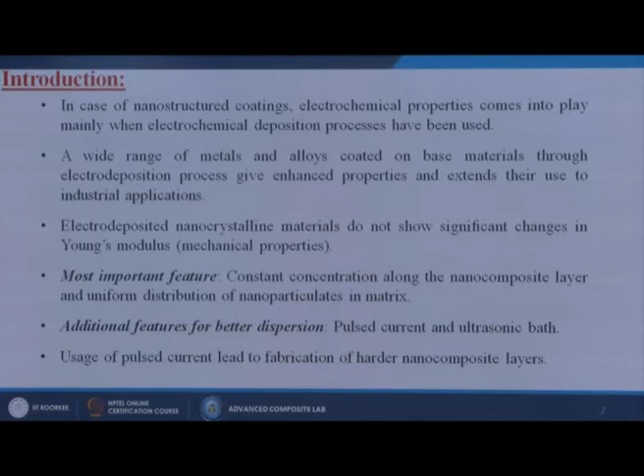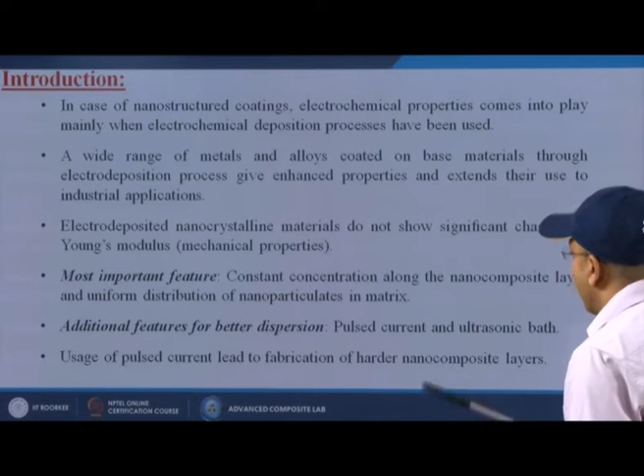The most important feature is constant concentration along the nanocomposite layer and uniform distribution of nanoparticulates in the matrix. Additional features for better dispersion are pulsed current and the ultrasonic bath. Usage of pulsed current leads to fabrication of harder nanocomposite layers. So, depending upon the synthesis technique we adopt, the nanostructured composites or coatings can give different properties.

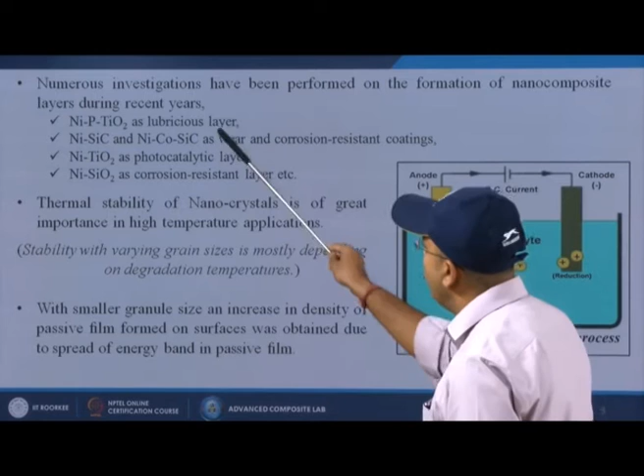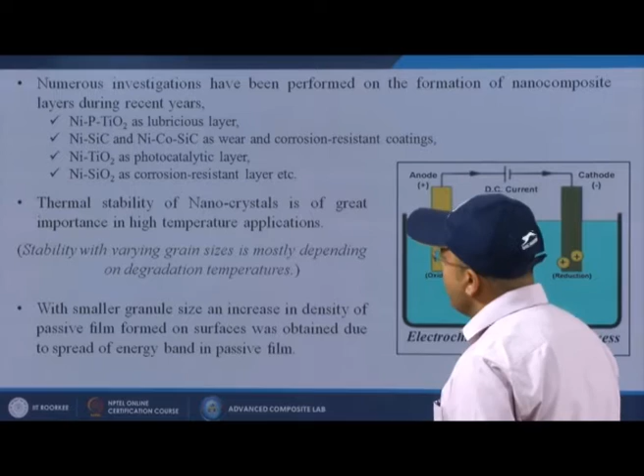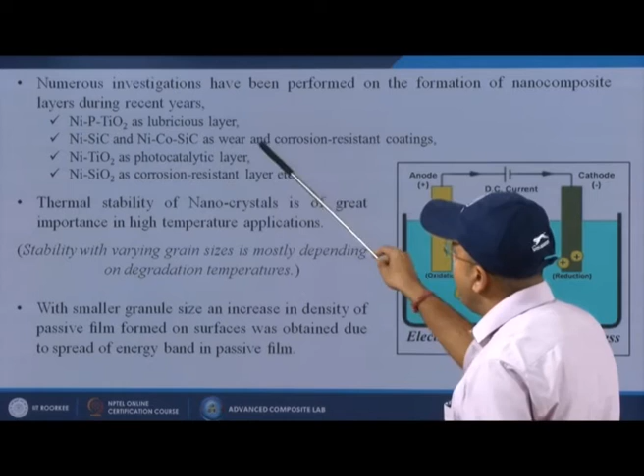Numerous investigations have been performed on the formation of nanocomposite layers in recent years, like nickel-phosphorus-titanium dioxide as a lubricious layer, nickel-silicon carbide and nickel-cobalt-silicon carbide as wear and corrosion resistant coatings, nickel-titanium dioxide as a photocatalytic layer, nickel-silicon dioxide as a corrosion resistant layer, etc. From these we are trying to show that when we change the material shapes or compositions, the total properties of the substrate change.

Thermal stability of nanocrystals is of great importance in high temperature applications. Stability with varying grain size mostly depends on degradation temperature, which will come in subsequent slides. With smaller grain size, an increase in density of the passive film formed on the surface was obtained due to the spread of the energy band in the passive film. That is one of the vital parameters of these techniques.

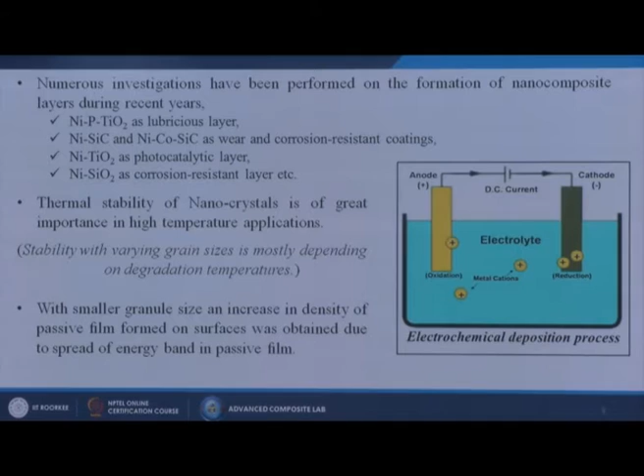Here is a schematic illustration. We have gone through it earlier, but for your remembrance I am telling you once again. We take an electrolyte based on what material we are going to coat; you have to choose an electrolyte of that particular metal's ions. Suppose I am going to coat our material with copper, then some copper sulphate solution or copper related material is used as the electrolyte, and we put our material on the cathode side.

When we generate a potential difference between these two electrodes, the copper sulphate divides into two parts, copper and sulphate, and then the copper will go and deposit onto the cathode, our substrate material.

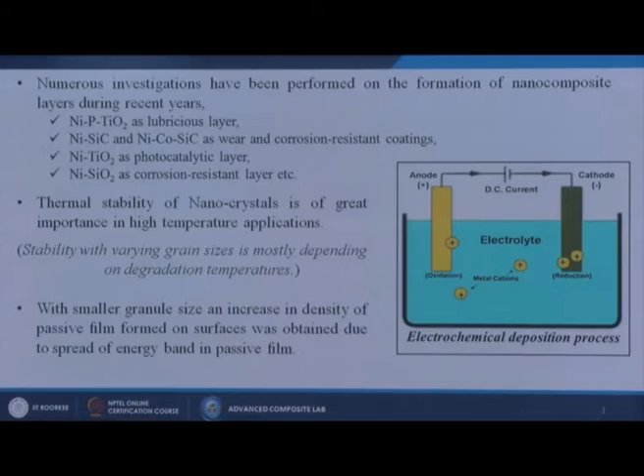So, like this way we can do the coating techniques onto our substrate itself. So, that is known as the electrochemical deposition process, or sometimes we are calling it electroplating too.

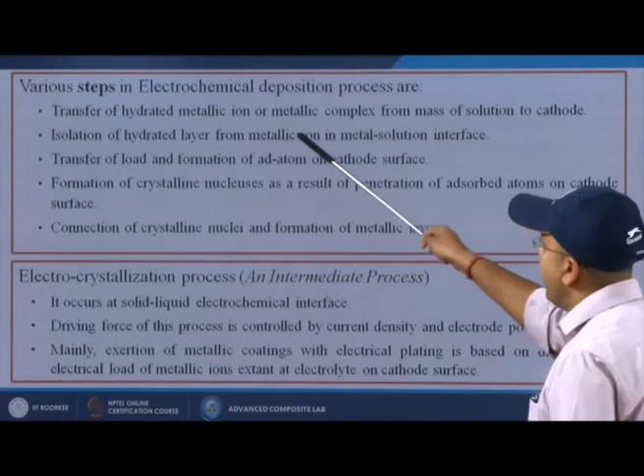So, there are various steps in the electrochemical deposition process, which are transfer of hydrated metallic ion or metallic complex from the mass of solution to the cathode. Already I have explained in the last slide. Isolation of hydrated layer from metallic ion in the metal solution interface. Transfer of load and formation of adatoms on the cathode surface.

Formation of crystalline nuclei as a result of penetration of adsorbed atoms on the cathode surface, connection of crystalline nuclei and formation of metallic layers. So, these all are the steps; actually it is occurring one by one when we are trying to do this kind of electrochemical deposition. Then there is also one intermediate process which is going on in between this.

So, that is known as the electrocrystallization process. It occurs at the solid-liquid electrochemical interface. So, when we are dipping our substrate into the electrolytic solution, that time this kind of reaction or technique is going on. Next, the driving force of this process is controlled by current density and electrode potentials.

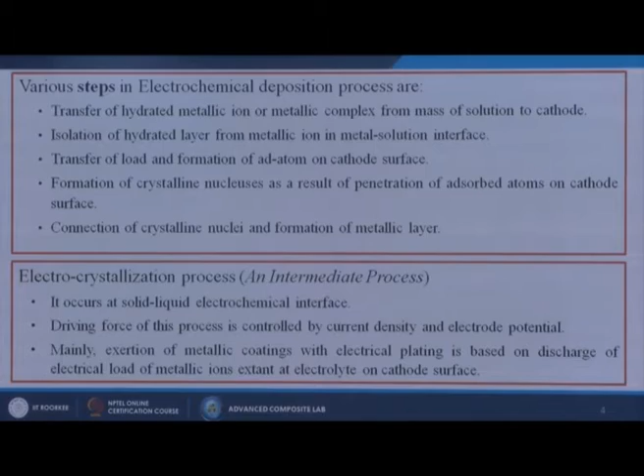Mainly exertion of metallic coatings with electroplating is based on discharge of electrical load of metallic ions extant in the electrolyte on the cathode surface. So, that is known as the intermediate technique. Before finishing the electrodeposition, generally this is occurring at the first instance.

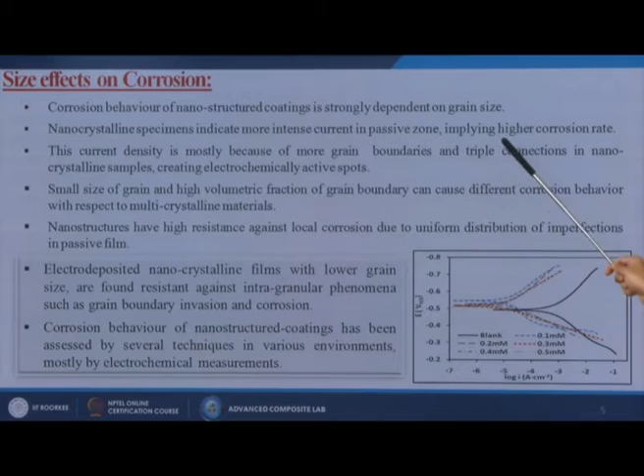Then we are going to show you, when we are talking about the size, when we are reducing the size of our crystallites, how it is affecting the corrosion properties. So, corrosion behavior of nanostructured coatings is strongly dependent on grain size. Nanocrystalline specimens indicate more intense current in the passive zone, implying higher corrosion rate. So, that is the principle behind this technology.

So, this current density is mostly because of more grain boundaries and triple junctions in nanocrystalline samples, creating electrochemically active spots. Small grain size and high volumetric fraction of grain boundary can cause different corrosion behavior with respect to multicrystalline materials. Nanostructures have high resistance against local corrosion due to uniform distribution of imperfections in the passive film. So, this is actually the main logic or main technology behind these techniques.

So, here we have given one example. Electrodeposited nanocrystalline films with lower grain size are found resistant against intra-granular phenomena such as grain boundary invasion and corrosion. Corrosion behavior of nanostructured coatings has been assessed by several techniques in various environments, mostly by electrochemical measurements.

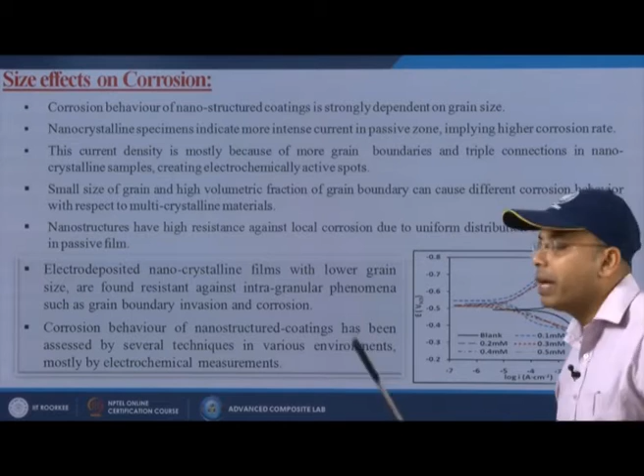So, the empirical testing is that when we are trying to check the corrosion properties, simply we are putting that material into some electrolyte solution, we are seeing how the chemical reaction is taking place, how much material in some stipulated time is removing from the surface itself. So, by doing this kind of experiment, we can check whether our material is corrosion proof or not.

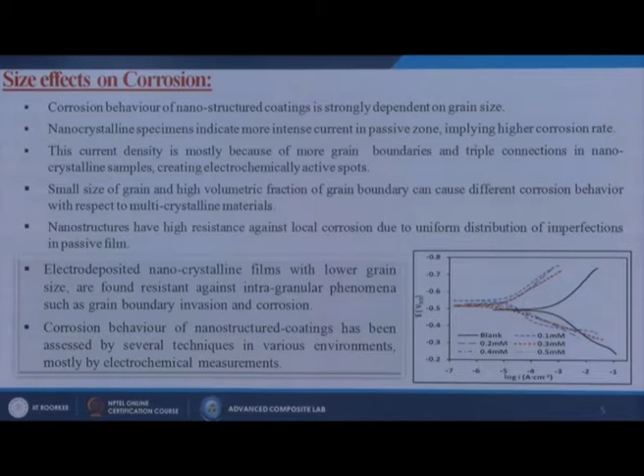Here also is one empirical example, where we have used different sizes of these particles, then we have measured the voltage versus current, and then we have shown how the corrosion properties are changing when we change the particle size of that particular nanoparticle.

Then here we have given one example: electroplated nanocomposites of silicon nitride and nickel. So, electrochemical properties of silicon nitride and nickel electroplated nanocomposites, such as corrosion current density after long-time immersion, were analyzed.

So, as I told already in the last slide, when we are dipping that material into the electrolyte, we are giving some time for our substrate to react with the electrolyte, then we measure the reaction time and how much material it is removing from the substrate itself. So, by taking this value, we put those values into the empirical formula, and simply we calculate how much material is corroding in that particular environment.

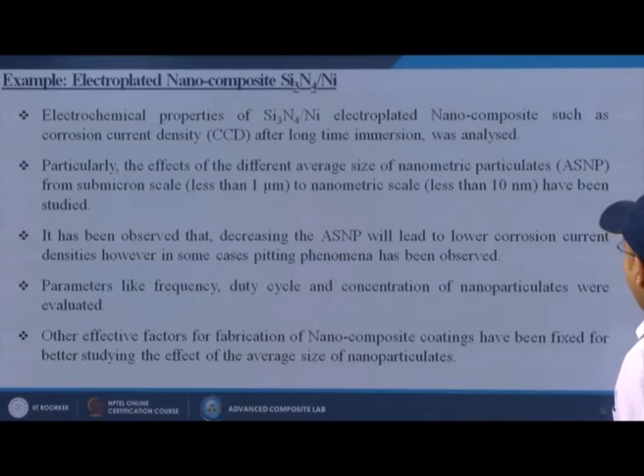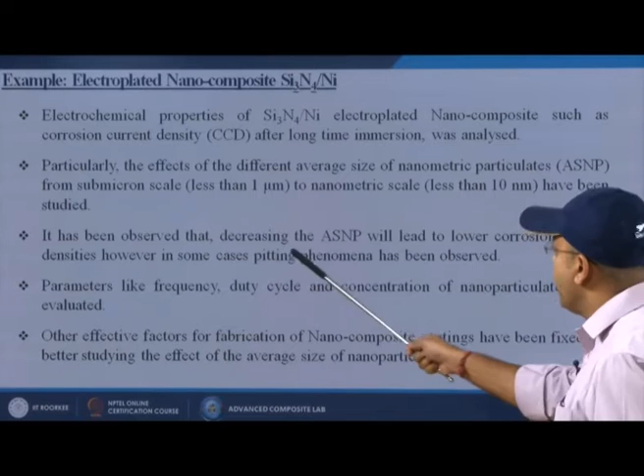Particularly the effects of the different average size of nanometric particulates, ASNP, from submicron scale, less than 1 micrometer, to nanometric scale, less than 10 nanometers, have been studied. It has been observed that decreasing the ASNP will lead to lower corrosion current densities.

However, in some cases pitting phenomena has been observed. Pitting phenomena is one kind of empirical phenomena. Suppose I am having several balls, and if I release those balls one by one, the balls will simply fall from a certain height onto that substrate or maybe onto the floor, and it will hit. Whatever kinetic energy that ball achieves will directly go onto the floor itself.

So, like this way, the electron bombardment is directly coming and hitting our substrate material continuously. That is known as the pitting phenomena. Parameters like frequency, duty cycle and concentration of nanoparticulates were evaluated. Other effective factors for fabrication of nanocomposite coatings have been fixed for better studying the effect of the average size of the nanoparticulates. So, here we have given several examples of how that size factor is affecting our corrosion properties.

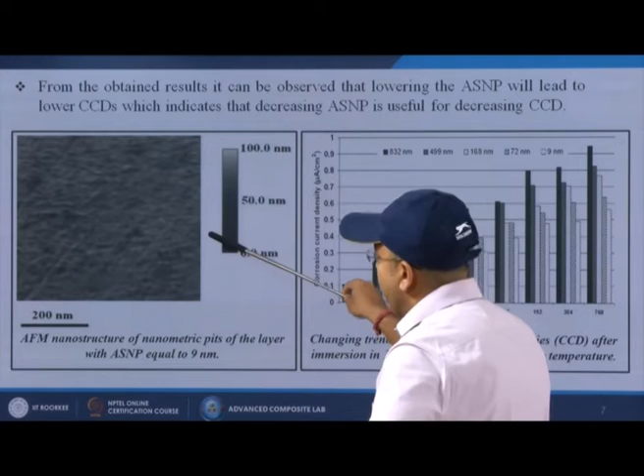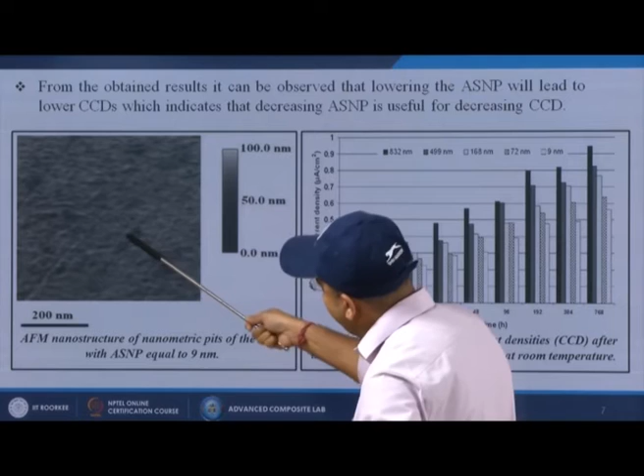From the obtained results, it can be observed that lowering the ASNP will lead to lower CCDs, which indicates decreasing ASNP is useful for decreasing the CCD. So, here we have shown an AFM, atomic force microscopy, image of nanometric pits of the layer with ASNP equal to 9 nanometer. From this figure, you can see that there is some kind of penetrating zone, some ridges, and also some small black holes which have occurred due to the pitting phenomena by the electrons or by the ions.

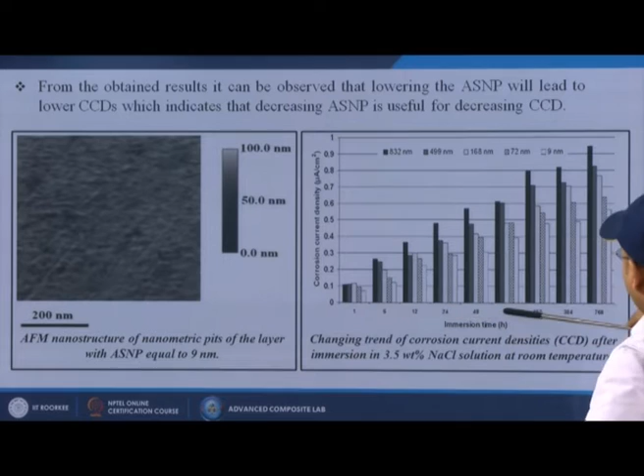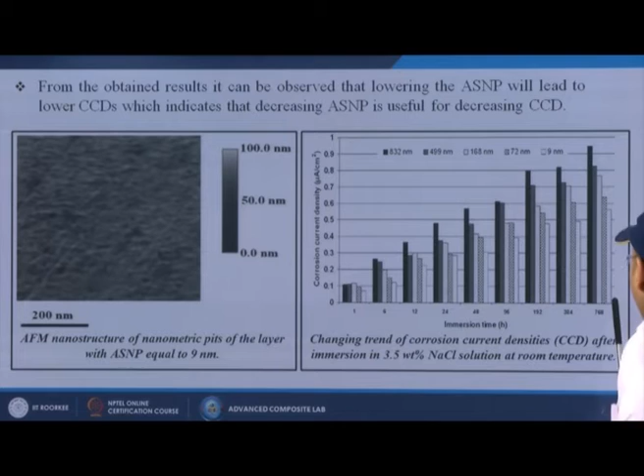On the right hand side we have shown, if we increase the immersion time, what the corrosion current density will be, and not only that, we are changing the particle size also. First we go for a bigger size, then slowly we decrease the particle size: the black one is 832 nanometer, then 499 nanometer, 168 nanometer, 72 nanometer, 9 nanometer. At high immersion time, we can see that the corrosion current for a smaller particle size is much lower than the bigger one, that is 832 nanometer particle size.

Here is also an example, the nanocomposite coating by electrodeposition method. A tertiary alumina, yttrium oxide and carbon nanotube nanocomposite was made by using pulsed current electrodeposition method. The coating process has been performed in a nickel sulfate bath, and the nanostructure of the obtained compound layer was examined with high precision scanning electron microscopy. Here we have done transmission electron microscopy and atomic force microscopy together. The atomic force microscopy gives the surface roughness of the coating materials, and the transmission electron microscopy gives the actual morphology of the nanoparticles on the substrate itself.

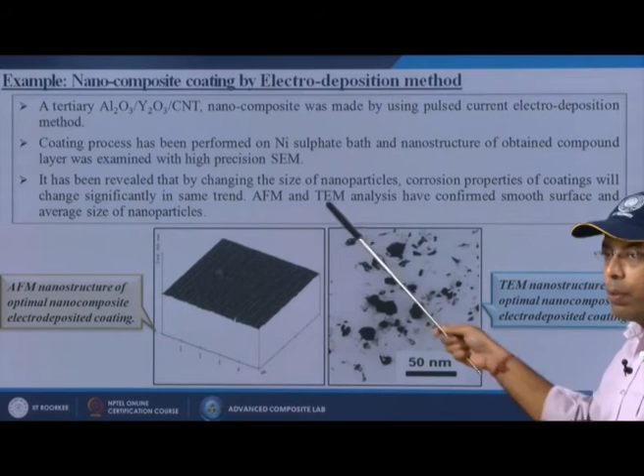In this case we have done the FESEM and the TEM also, but here we have only shown the transmission electron microscopy image of the sample. It has been revealed that by changing the size of nanoparticles, corrosion properties of the coating will change significantly in the same trend. AFM and TEM analysis have confirmed the smooth surface and average size of the nanoparticles.

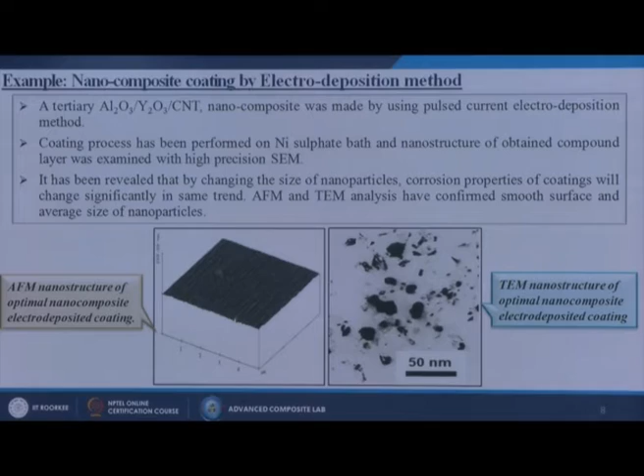Then the Taguchi method for design of experiments has been used for optimizing the tertiary nanocomposite electrodeposited coating process parameters for the corrosion protection of treated samples, because we have several average nanoparticle sizes. So, we use the Taguchi method to optimize the particle size diameter and all the input parameters, so that we can uniformly use all the particle size diameters and all the input parameters.

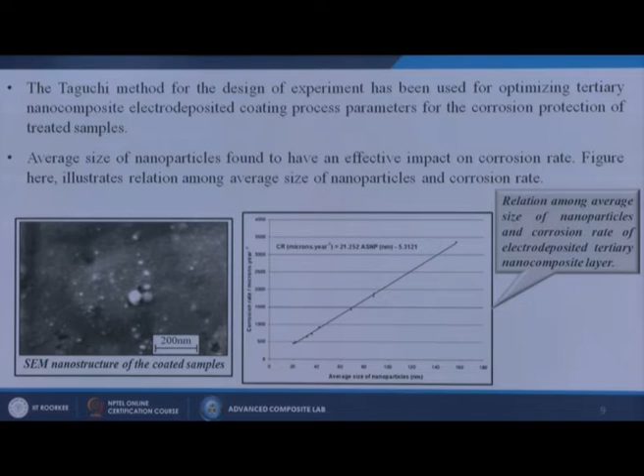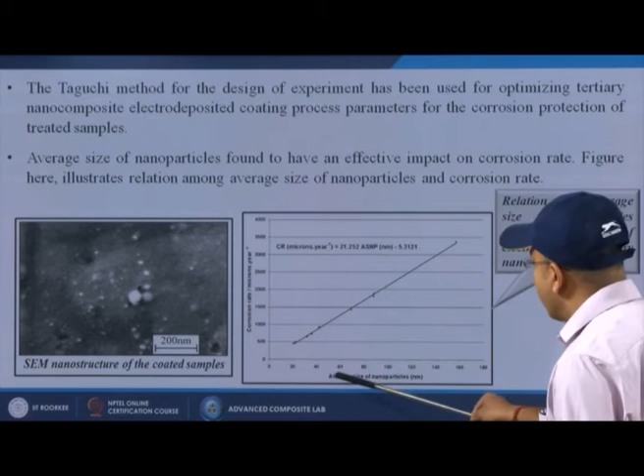Average size of nanoparticles was found to have an effective impact on corrosion rate. The figure here illustrates the relation between average size of nanoparticles and the corrosion rate. In this figure we see the scanning electron microscopy nanostructure of the coated samples. From that figure we can easily measure the particle size of the composites, and in the graph the x axis shows the average size of the nanoparticles and the y axis shows the corrosion rate.

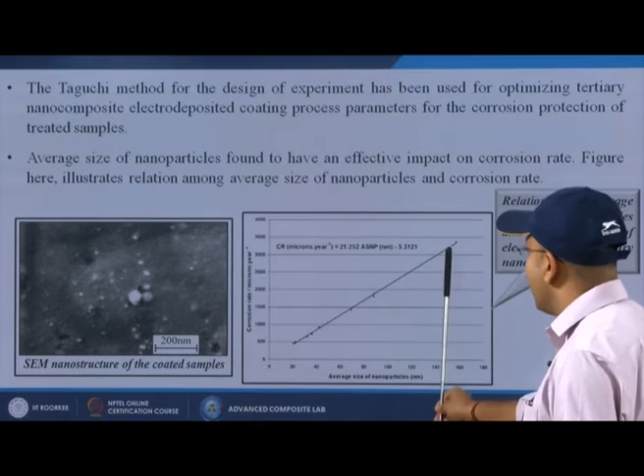So here we are trying to show you how we are increasing the nanoparticle size and how the corrosion rate is increasing. That means if we reduce the particle size of that particular nanocomposite or nanofillers, automatically the corrosion rate will decrease.

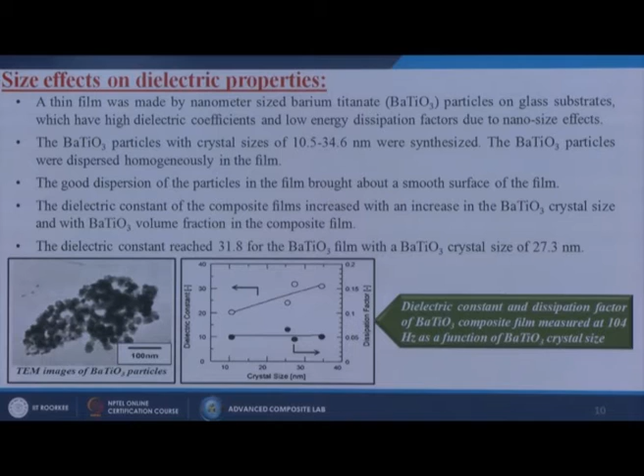Next we are talking about the size effects on the dielectric properties. When we are using this kind of material for semiconductor or electronic purposes, these dielectric properties are the most vital parameters that we have to check, whether our material can be electrically conductive or not. So a thin film was made by nanometer size barium titanate particles on glass substrates which have high dielectric coefficient and low energy dissipation factor due to nano size effects.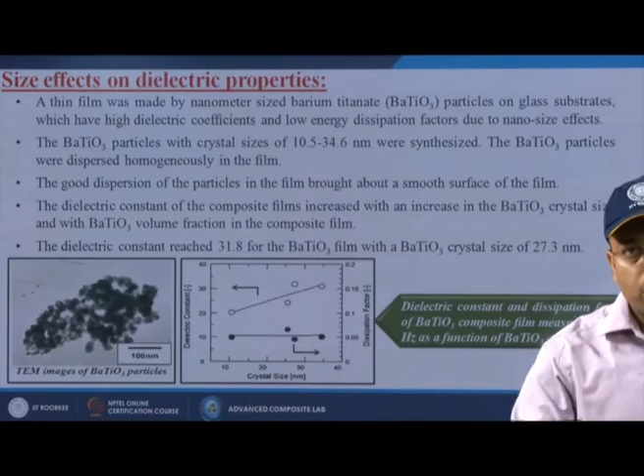The barium titanate particles with crystal size of 10.5 to 34.6 nanometer were synthesized and were dispersed homogeneously in the film. From the TEM image we can see that barium titanate has been homogeneously dispersed among the matrix itself. Then the good dispersion we achieved in the film brought about a smooth surface of the film.

The dielectric constant of the composite films increased with an increase in the barium titanate crystal size and with barium titanate volume fraction in the composite film. The dielectric constant reached 31.8 for the barium titanate film with a barium titanate crystal size of 27.3 nanometer.

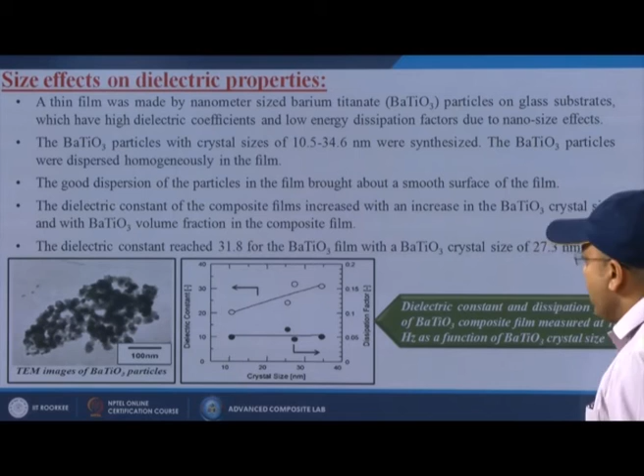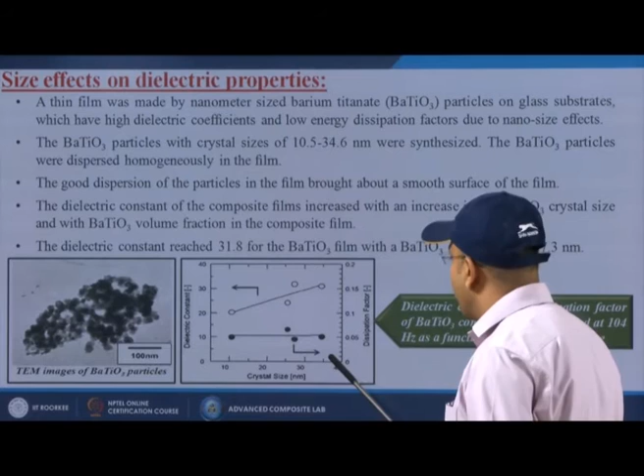In this particular case we can see that when we are increasing the crystal size, the dissipation factor is not changing much, or changes only minimally, but the dielectric constant is rapidly changing with the increasing crystal size. When the crystal size was around 10, the dielectric constant was almost 20, but when it reached up to 35, its value went up to 30. So the increase in particle size clearly reflects that the dielectric constant of that particular material is changing.

Then we have also done some detailed investigation about the duty cycle. Duty cycle is a process parameter in the electrochemical deposition process by which we can change whether our material can store some kind of energy or not, or how it reacts when we apply a certain voltage or current to that particular material.

So here we have prepared nickel with tungsten and CNT composite layer formations by electrodeposition techniques. Nickel tungsten CNT nanocomposite layers with high content and uniform dispersion of carbon nanotubes were fabricated using pulsed electrodeposition techniques, which is also an advanced deposition technique we have already discussed in our previous lectures.

The concentration of nanoparticulates and process effective parameters on the electrochemical properties of coated samples was studied. SEM, AFM and microhardness tests were carried out for analyzing the nickel tungsten carbon nanotube nanocomposite layer. Microhardness increased for different nanocomposite layers with different amounts of CNT.

So here we are changing the loading of CNT into this composite system. Microhardness of nanocomposite layers did not change significantly by changing the duty cycle. The effect of duty cycle on distribution of CNTs in the nanocomposite layer shows strong attendance but does not change the tungsten content in the metallic matrix.

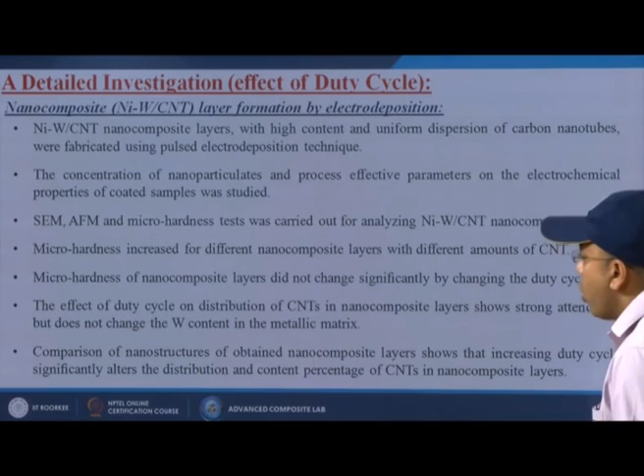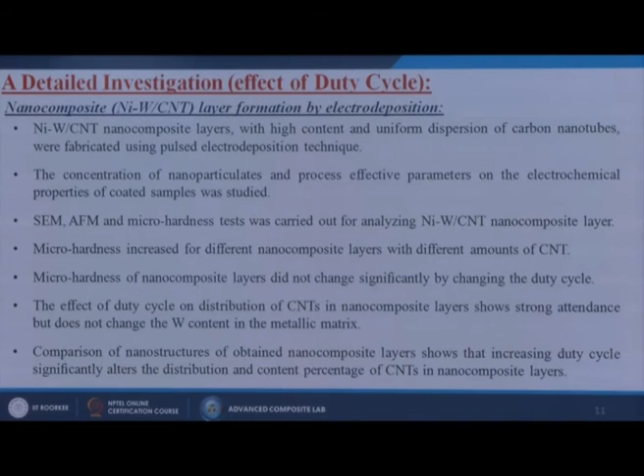Comparison of nanostructures of the obtained nanocomposite layer shows that increasing duty cycle significantly alters the distribution and content percentage of CNTs in nanocomposite layers. So these are all the obtained results which we have received by doing this kind of testing, or by making this kind of materials.

So here we are trying to show you some results. It has been observed that carbon nanotube content will increase by increasing duty cycle, and agglomeration of nanoparticles will decrease at higher duty cycle. So that is the added advantage for this particular case.

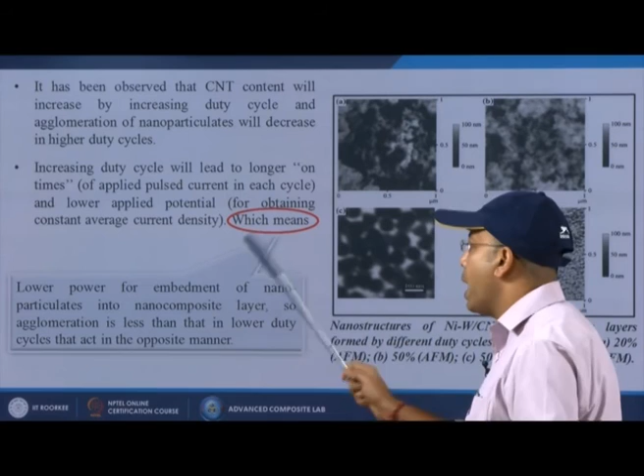Increasing duty cycle will lead to longer on-times of applied pulse current in each cycle and lower applied potential for obtaining constant average current density, meaning lower power for embedment of nanoparticulates into the nanocomposite layer. So agglomeration is less than that in lower duty cycles, which act in the opposite manner. Actually, what should happen is not happening - the vice versa case is happening over here.

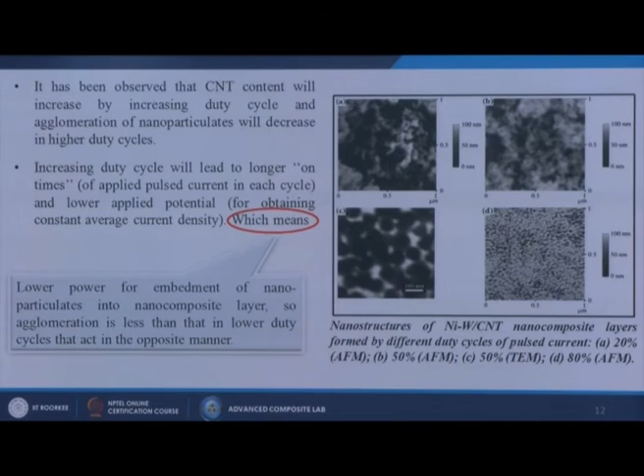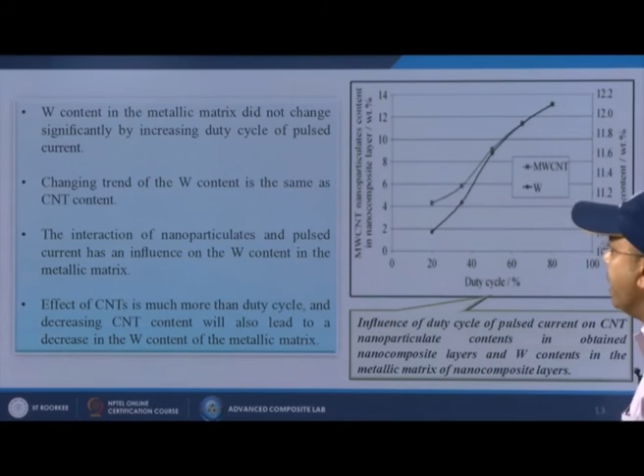Here we are also showing the duty cycle percentage and how it changes when we apply multi-walled carbon nanotubes into different percentages, when using tungsten content at different percentages, and when using both. So tungsten content in the metallic matrix did not change significantly by increasing the duty cycle of pulsed current. The changing trend of tungsten content is the same as CNT content.

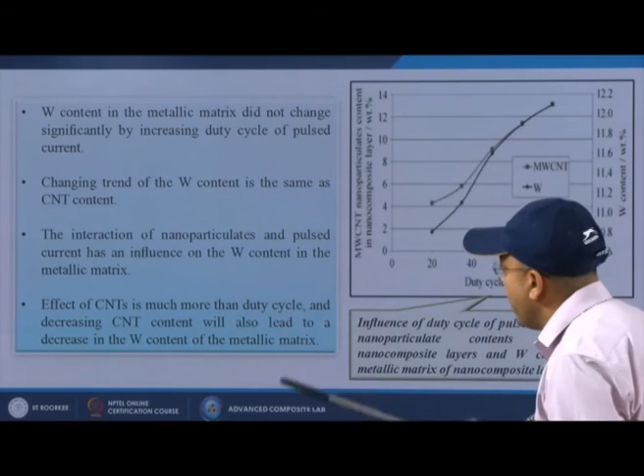In this particular case, the interaction of nanoparticulates and pulsed current has an influence on the tungsten content in the metallic matrix. The effect of carbon nanotubes is much more than duty cycle, and decreasing carbon nanotube content will also lead to a decrease in the tungsten content of the metallic matrix.

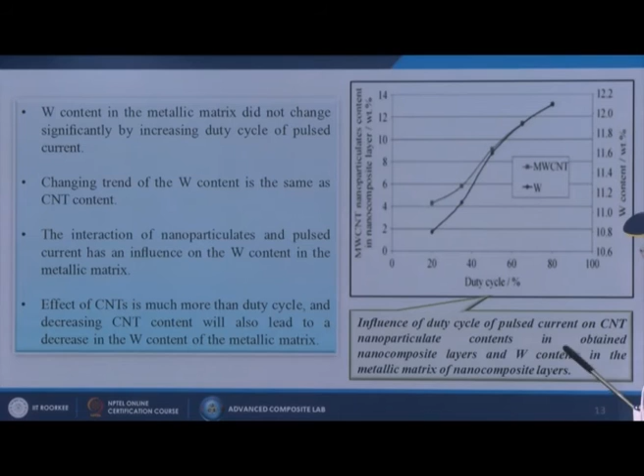From this particular figure we can see the influence of duty cycle of pulsed current on carbon nanotube nanoparticulate contents in the obtained nanocomposite layers, and tungsten contents in the metallic matrix of the nanocomposite layers. So that is a mixture, or maybe a hybrid composite kind of thing.

Then we have measured the micro hardness also in terms of the duty cycle for these particular samples. Micro hardness of nickel tungsten nanocomposite layers with respect to different concentrations of carbon nanotubes, as well as different applied duty cycles, has been shown in this particular table.

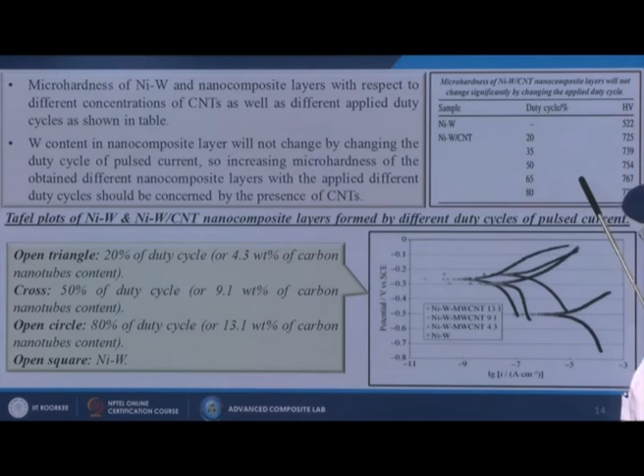In this case the tungsten content in the nanocomposite layer will not change by changing the duty cycle of pulsed current. When using only nickel and tungsten, the hardness value comes around 522. But when introducing carbon nanotube into the system at 20% duty cycle, the hardness value goes to around 725, and if we increase the duty cycle up to 80%, the hardness value goes up to 779.

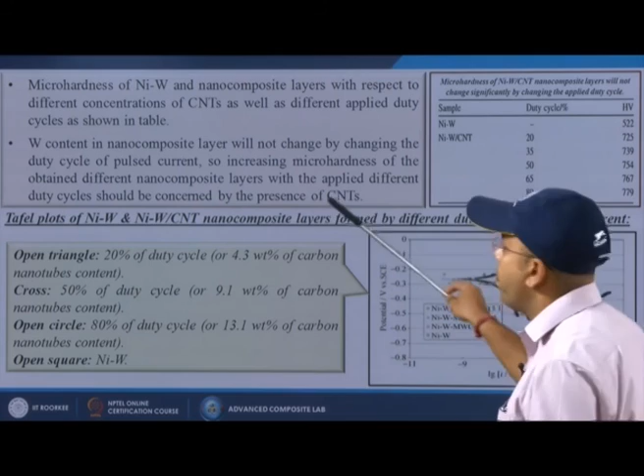That means the increasing micro hardness of the obtained different nanocomposite layers with the applied different duty cycles should be attributed to the presence of CNTs. So in this particular case, the carbon nanotube plays a vital role in these systems.

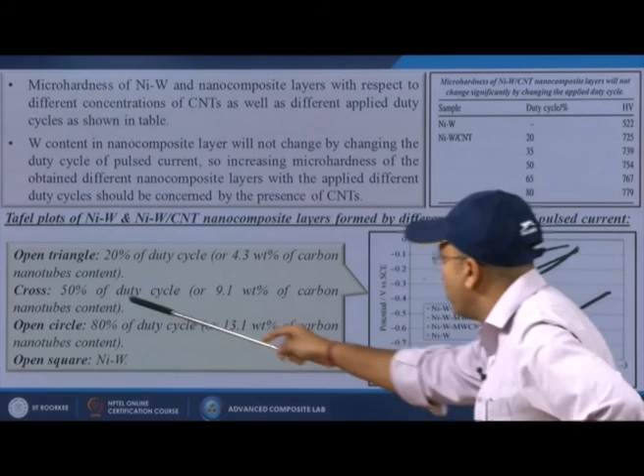Here we are also showing certain Tafel plots of nickel tungsten and nickel tungsten CNT nanocomposite layers formed by different duty cycles of pulsed current. When we talk about the open triangles, that represents 20% duty cycle or 4.3 weight percent carbon nanotubes content.

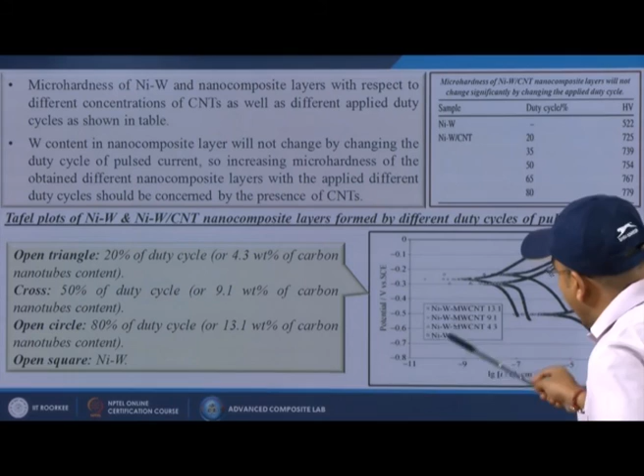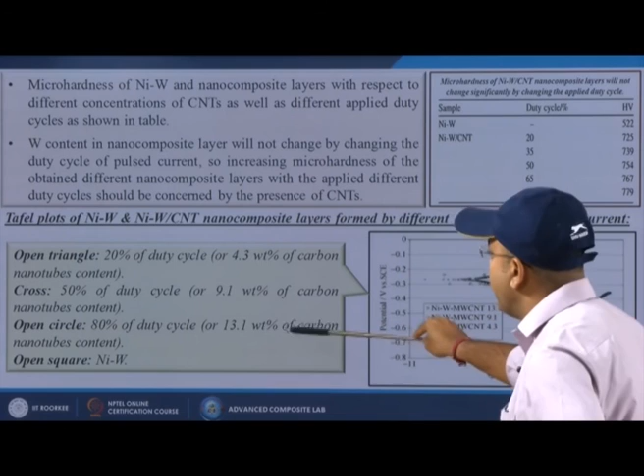Here we have shown 4 different graphs, or 4 different samples, but it is not easily or visibly shown, which is why we note that cross means 50% duty cycle or 9.1 weight percent carbon nanotubes content. The open circle means 80% duty cycle, that is 13.1 weight percent carbon nanotubes content, and open square is only the simple nickel and tungsten composite, except the carbon nanotubes.

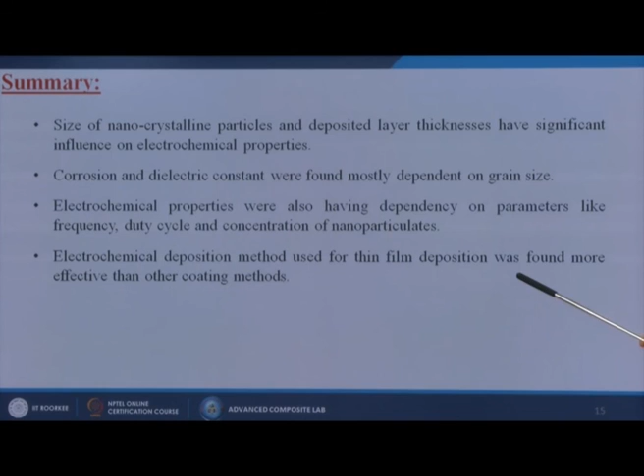Electrochemical deposition method used for thin film deposition was found more effective than other coating methods. Actually, this lecture is only dealing with the particle size which is affecting the electrochemical depositions or electroplating techniques.

Here we have gathered some examples from literature review, and also given some results from what we are doing in our lab. But there are numerous applications and numerous materials which we are going to use that can give better electrodeposition properties, or better electroplating properties.